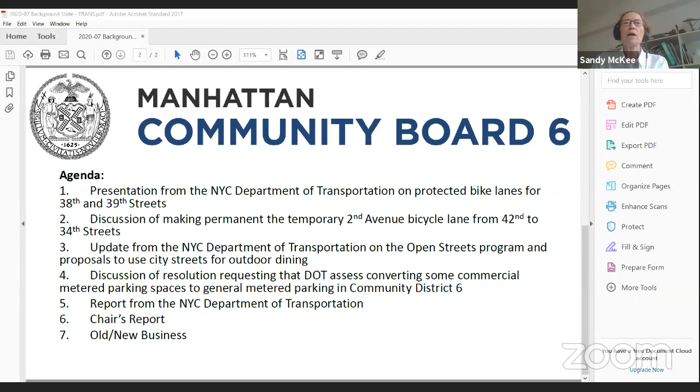And I'm sorry, do we have someone? Not all at once now, not all at once. No one so far. Oh, Phil. Well, Phil took them last month. Let's, I'm happy to share the wealth. Joan, it's an inaugural minute taking, would you be interested? No.

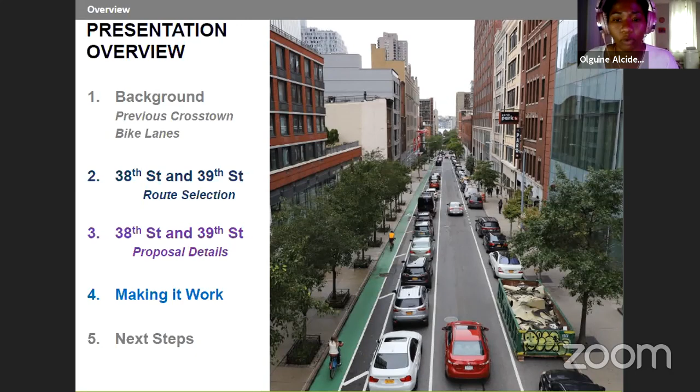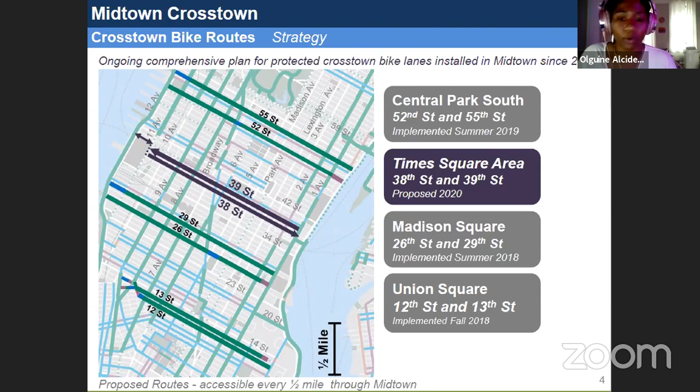This is something that Kim just briefly touched on, but the map shown here shows the previous crosstown routes to demonstrate the ongoing comprehensive plan for protected crosstown bike lanes in Midtown. This effort began in 2018 and includes routes spaced every half mile apart through Midtown from Union Square to Central Park.

Starting in 2018, we installed lanes on 26th and 29th, 12th and 13th, and most recently on 52nd and 55th Street, which are shown here on green. Tonight, we'll be discussing our proposal for 38th and 39th Street.

These projects all build on the ongoing conversations and feedback we've received from the Community Board and CB 5 and 4. Additionally, they work towards a goal of installing new crosstown protected bike lanes to close the gaps in the network, upgrade existing bike lanes to provide better access to destinations, transit, and greenways, while still accommodating traffic and loading in their design. Lastly, we plan to have a similar process to previous crosstowns and looking to the board to work with us on perfecting the design to meet many of the different land uses and stakeholder concerns that may come up.

In terms of outcomes following the installation of lanes in the 50s and 20s, we found that installation resulted in an increase of cyclists using the lanes along these corridors. Vehicle travel times were also not adversely affected by the redesign of the corridors, and the updates to the curbside regulations were effective and well used. The design elements in these projects were generally found to be both replicable and flexible for use in Midtown.

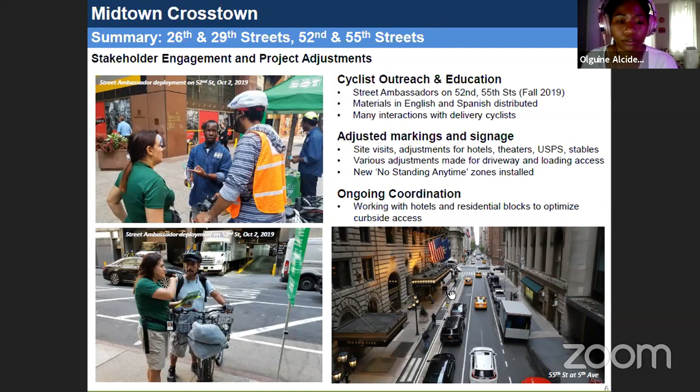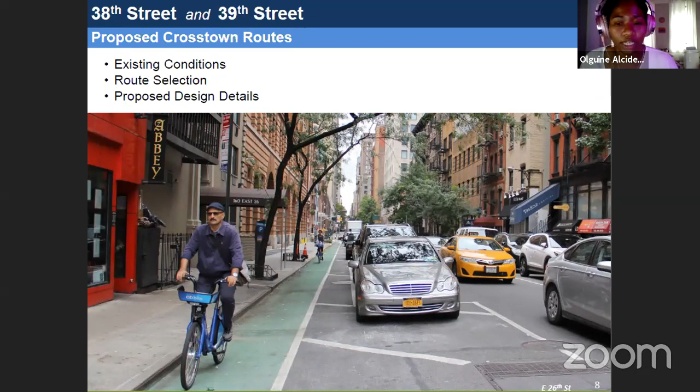Moving on to route selection, I'll review the existing conditions of the proposed project area, the selection process, and the details of our design. The area surrounding our proposal includes Midtown between 34th Street and 42nd Street. For context, the area includes high volume destinations such as Times Square, Bryant Park, Javits Center, and a dense commercial district.

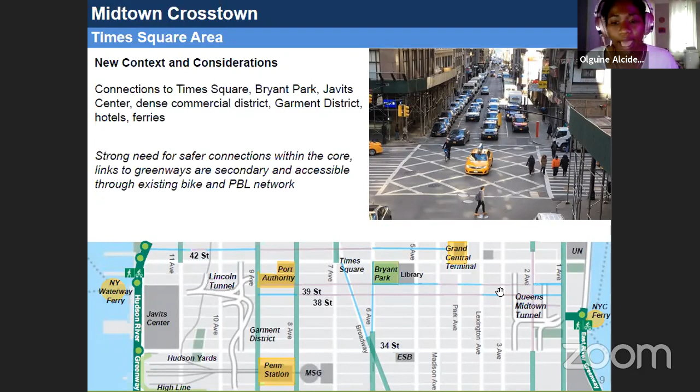In relation to the bicycle network, there's generally a lack of protected bicycle lanes, which makes it difficult to access many of the various destinations identified on this map. As you can see, the green lines are the protected routes, and the blue and pink identify the conventional and shared lane. These exist in some areas, but generally there's a lack of continuous and connected infrastructure in Midtown.

The streets in this area differ a bit from the previous crosstown routes in the 50s and the 20s. Some new considerations include wider roadways with multiple travel lanes, and in our observations, we found that there is excess capacity during the off-peak. The 10-foot travel lanes include shared bike lanes in some areas, which make them narrow for simultaneous travel.

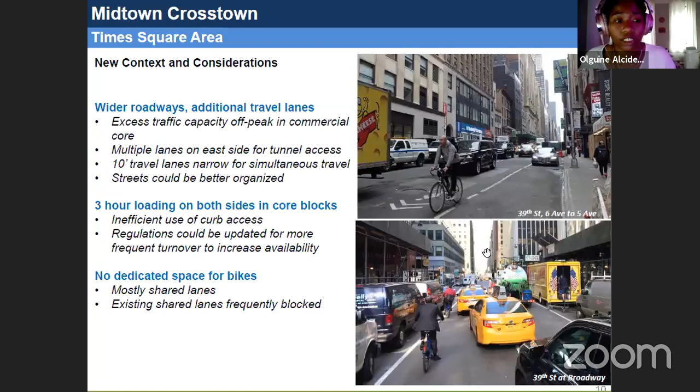In terms of our route selection process, we considered the area between 42nd and 34th Street to be optimal for maintaining the half-mile distance from the previously installed crosstown routes. Similarly to the previous crosstown routes, we looked at continuity and connectivity as the greatest determining factors for our route selection. But for this area of Midtown and for this project, there were some additional challenges in the street network that were taken into consideration in our planning process.

Also, in terms of connectivity, there weren't many streets in this area that connect from the Hudson to the East River. So we prioritized streets that connect across town to the First Avenue bike lane.

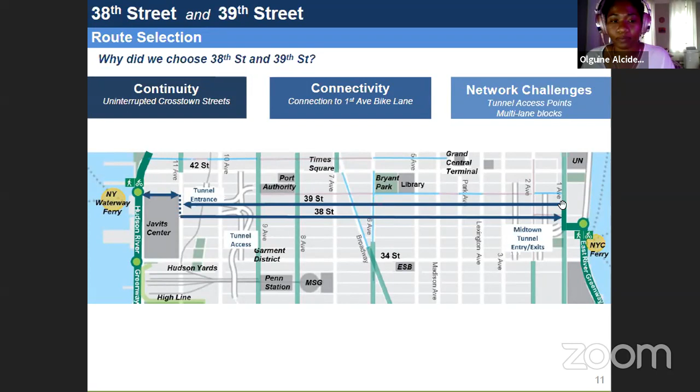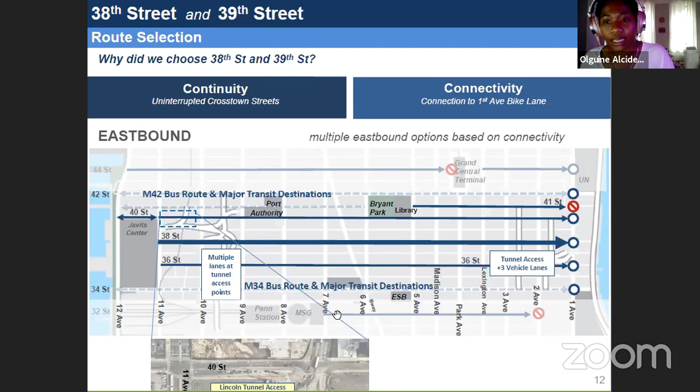Looking at the eastbound streets in this area, 38th Street really stands out as one of the most viable eastbound routes between 11th Avenue and First Avenue. Just to call out one of the many issues with the neighboring streets, 40th Street crosses the Lincoln Tunnel entrance and a major Port Authority exit, and we see similar difficult network conditions on the other neighboring routes.

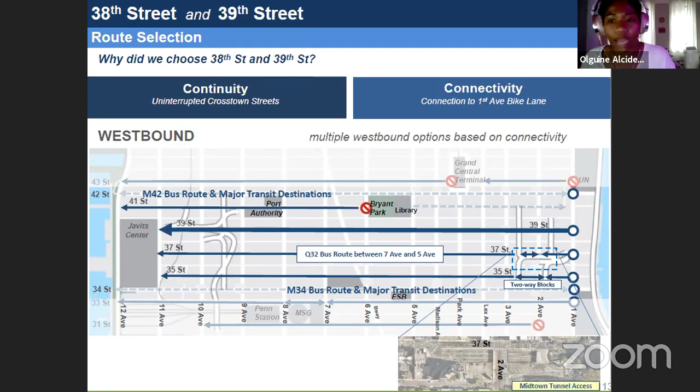In the westbound direction, 39th Street similarly stands out as the best option, as many of the neighboring routes overlap with tunnel entrances, or are discontinuous, or have two-way conditions that are not ideal for our proposed design.

Moving into some details of our presentation and proposal, the previous crosstown protected bike lanes featured two designs: delineator-protected with curbside buffered bike lanes, and parking-protected lanes, similar to what we've seen on the previous crosstowns like 26th and 29th, 52nd and 55th. Our proposal for 38th and 39th Street will use very similar treatments, but incorporate rush hour lanes to accommodate the higher vehicle volumes seen during peak traffic conditions.

38th and 39th Street can be broken down into three distinct neighborhoods with different characteristics. On the west side within CB4, we have the Lincoln Tunnel access and mostly one travel lane with two parking lanes. In the commercial core within CB5, the streets generally have two travel and two parking lanes. Lastly, on the east side in CB6, which we'll be discussing tonight, the blocks are very irregular and have multiple travel lanes and rush hour lanes. These irregular blocks are what we'll be focusing on for tonight's presentation.

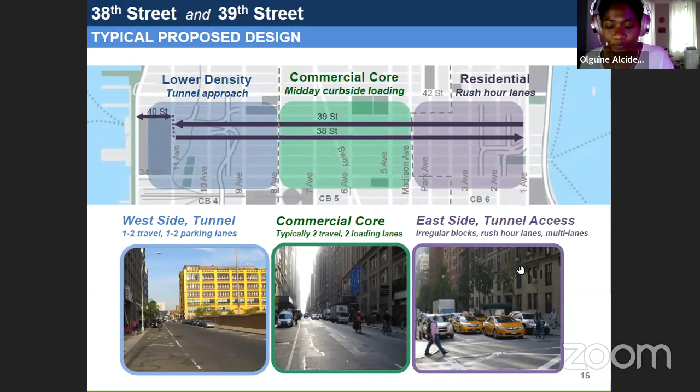On a related note, in response to COVID and the need to develop transportation options as the city reopens, we've been installing temporary bicycle routes throughout the city. Last month, we began installation of barrels and signage to provide space for cyclists on 38th and 39th, west of Madison Avenue. 38th and 39th Street had two travel lanes and two parking lanes.

As part of the temporary design, we shifted the parking lane into the second moving lane, shown here in this cross section. This provides space for the temporary lane and barrels. We've been monitoring these lanes daily, with some of our staff going out to shift these back into place, hang additional signage, and speak to business owners and drivers along the corridor.

We're reaching the halfway point of the presentation and moving into some of the details of our design. The core proposed design for 38th and 39th Street, between 8th Avenue and Madison, is very similar to the previous crosstowns I've mentioned, in that it provides a parking protected bike lane along both streets.

However, it will differ from the temporary design. The thing to focus on here is that this is really identifying the CB5 section. This design is flexible in that it provides dedicated space for cyclists, but still allows for the two lanes of traffic for the high vehicle volume during the day.

And it maintains overnight and off-peak loading and parking. So the curbside lane is also a far more comfortable condition for cyclists who use the existing shared routes at this location. The described treatment will also be seen in some of the areas we'll be discussing east of Madison Avenue.

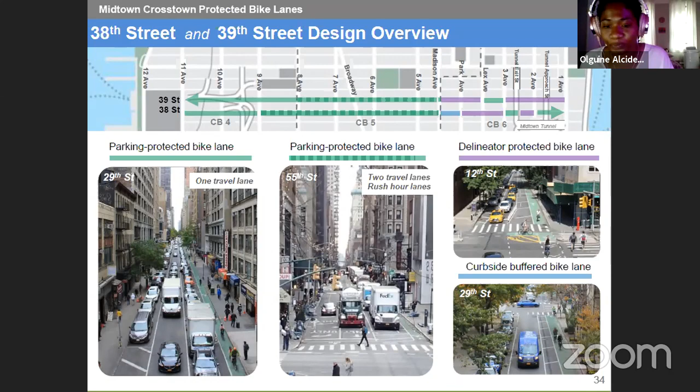To touch on next steps, tonight we discussed the segments of 38th and 39th Street, which fall within the boundaries of CB6. However, we also wanted to briefly touch on the typical design for the western segments of the proposals. On the CB4 side, the design would be parking protected with a single travel lane. In CB5, where the densest commercial activity occurs and the street width is a bit more generous, the design is more typical, with parking protected bike lanes and rush hour lanes, which maintain two travel lanes during peak conditions. The design varies the most in CB6, which we've covered tonight, with delineator protected bike lanes, curbside bike lanes, and even some rush hour treatments in select locations.

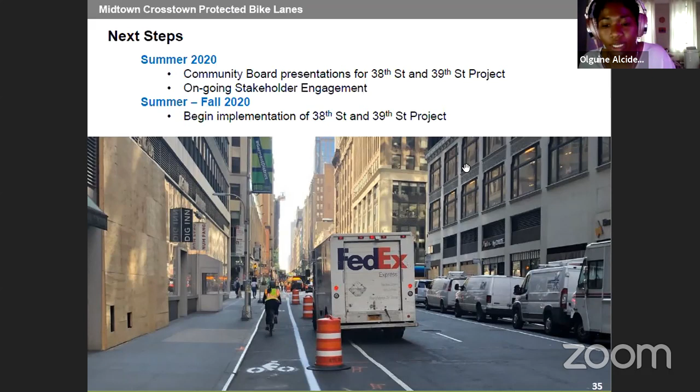Again, for next steps, we would like to move as soon as late summer or early fall with installing these lanes permanently in response to the demand we've seen from the temporary lanes. But we would continue to engage with stakeholders and the neighboring community boards.

Thank you, and I guess I'll open up to any questions. Thank you very much, and just a reminder, we do take questions from committee members first, and then if we have time, we take them from the public. I did have a couple questions myself, if you don't mind.

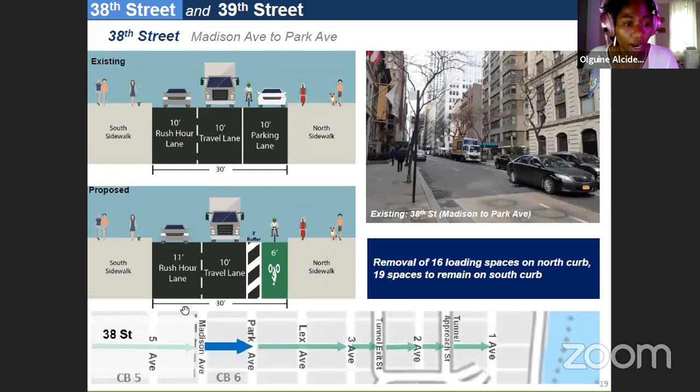I wondered why on 38th Street you're shifting to the north side of the street, where currently the bike infrastructure is on the south side. Are you referring to the sharrows? Yes, sharrows are on the south side of the street. Generally, we've designed the protected bike lane to go with the flow of traffic and also take advantage of the parking lane on the existing side of traffic. Currently, we wanted to maintain the rush hour lane on the opposite curb.

So people going down First Avenue to get to the Greenway will have to cross the traffic. Currently there's a two-way section of First Avenue on that last block of 38th Street, so cyclists would be able to turn at this location to make that connection to the Greenway. Right now they have to cross the street to do it, I'm just wondering—yeah, that would be on the north side throughout the full district. It would be on the north side, but something we're looking at on First Avenue is a turn treatment to make that connection a little bit safer.

Okay, thank you. And I guess we should ask how many parking spaces will be reduced. It differs by block, but we've also included a breakdown of the parking loss numbers at each location. It seems fantastic, it's not a problem I don't think in this district, in this area. So I'll open it up to questions.

Larry, you had a question? Your hand is raised. Okay, I'm unmuted. I had some questions to try to get a better understanding of what's going to happen.

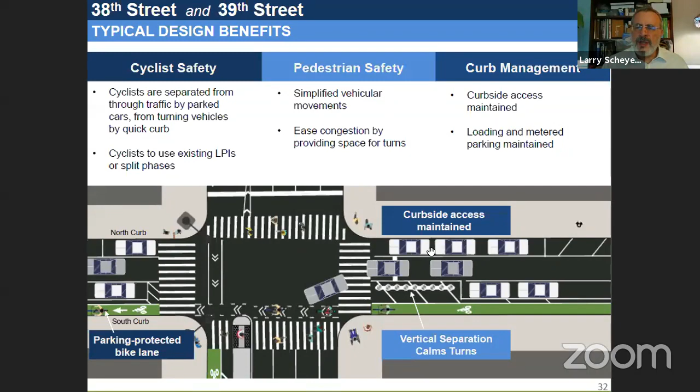As Sandy's question noted, at 38th Street and First Avenue, as I understand it, that means you're going to have to wait through a phase of the light in order to go down to 37th Street via First Avenue? Yes. Okay.

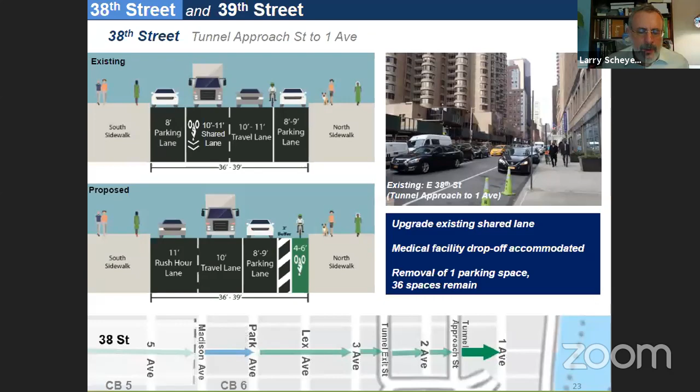At 39th Street and 2nd Avenue on the southeast corner, there's currently a Citi Bike station, which you depicted in one of the photographs. Where will that be moving? So generally, we would look to relocate some of those Citi Bike stations onto the avenues, but this is something we're still discussing with Bike Share, and we don't yet have a location, but that's something we're coordinating on.

Okay, because that's a very important bike share station—I use it to go to the NYU Rusk Institute building at 38th and 2nd. So there are many users there, both doctors and patients, for whom keeping that station nearby would be helpful.

Yes, we'll take that into mind.

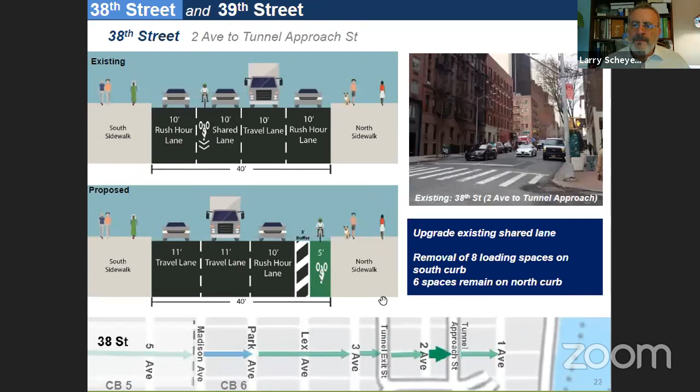Okay, and then one other thing that you showed was hotel zones. I was not clear, maybe you could go over that again, where the bikes are going along in a protected lane. Would there be a situation where there would be a conflict between cyclists and people moving luggage who may not be paying attention?

So what we would employ at this location, and what we've installed at previous hotel loading zones, is really a treatment specifically to warn cyclists as they're moving through the area. In past hotel loading zones we've installed, we've found that some stakeholders have even put out additional signage to slow cyclists through that area, but there would be appropriate signage and clear markings on the street to indicate to cyclists that they're moving through an area where there's hotel activity going on.

Yeah, hopefully it won't be forcing you to zigzag, because some vehicles pull in straight to the curb and don't leave any room for the bicyclists. This condition exists currently on the 55th Street and 52nd bike lanes, and it seems to be working fairly well through our district anyway.

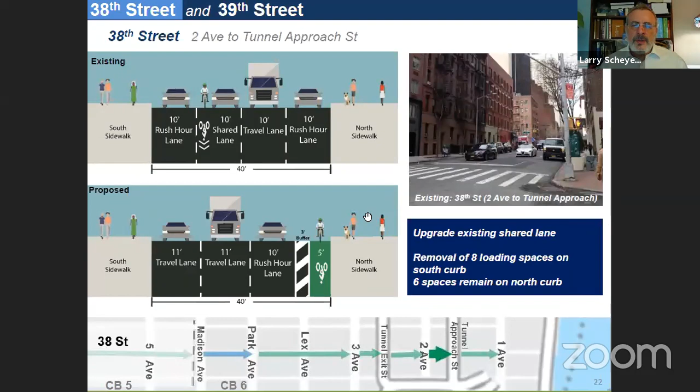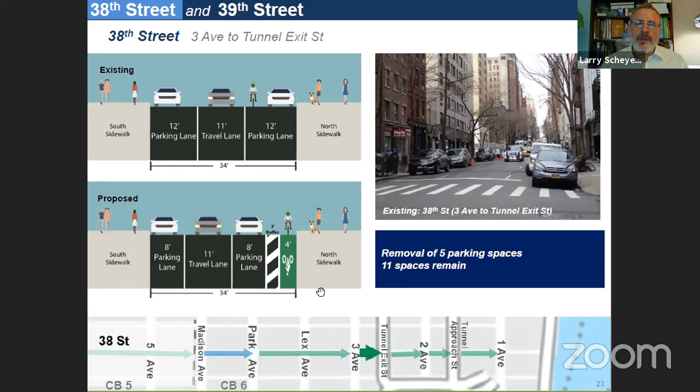Okay, good, good. And then the last question concerns, not now in the middle of the summer, but when we get to the winter - I noticed the width of various segments of the bike lane plus the buffer zone are rather narrow. I'm wondering, if you don't have specialized snow plowing equipment, how you intend to keep that bike lane clear.

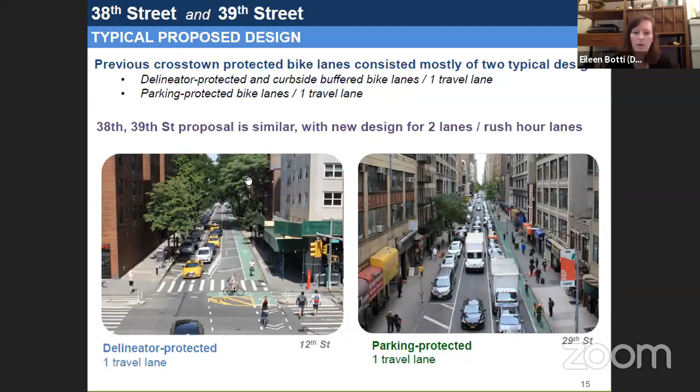Hi, I can jump in. This is Eileen with the bike unit also. We have similar clearance on the other crosstown lanes. What we usually do here is that they get swept and plowed during alternate side, or in this location where the meter turns over, so these vehicles are moving each day. There'll be a lot of opportunities to get in there and sweep without even needing the specialized plowing equipment here. If it is needed, we can look into that as well, but usually it's worked out pretty well with the vehicles moving, since it's parking protected.

Well, how does that work when you have a lot of snow and vehicles are not forced to be moved?

In some of those scenarios, we have been able to use a much smaller sweeper that's available on a very limited basis. But what we've found, especially on these two streets, is that the vehicles are moving frequently because they're generally commercial meters or rush hour regulations where there's a lot of daily turnover. But we'll keep an eye on it. As to the other lanes that have the delineators, those are designed with that clearance in mind, so plows could always get through.

Okay, thank you very much. That's it for me. Thank you, Larry. Anne, you had your hand raised? Sorry, you're on mute. Sorry, I lost myself and couldn't find myself to unmute.

First of all, I really want to thank you, this is a great presentation. It's very thorough. I really appreciate you answered a lot of my questions as it went along.

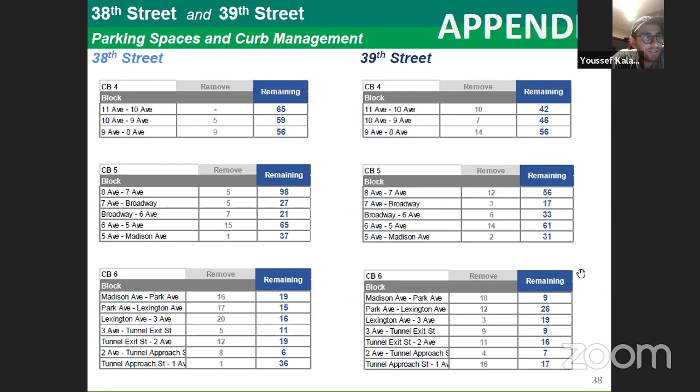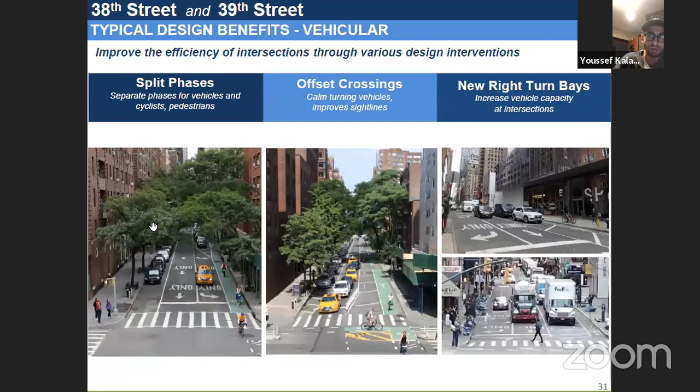Thank you, Sandy. So two quick things. One is I often use the 52nd Street bike lane west to east, and oftentimes that corridor between 3rd Avenue and 2nd Avenue, because there's so much traditional commercial loading, ends up being blocked up typically like in the morning into the afternoon, even though there's a bike lane there. So I'd love to understand what type of outreach is done with some of the larger tenants on those blocks with a lot of commercial loading, and what type of enhanced enforcement is done early on when a new lane is constructed. Because I imagine the same thing's going to happen here, and it ends up, in fact, feeling more dangerous at times than anticipated. Can you just say which blocks that was again? So the 52nd Street west to east bike lane, probably from 3rd Avenue to 2nd Avenue is one of the worst stretches, and again it's all commercial loading. It's fairly large tenants, high rises, those sorts of things.

So I don't know if there's a playbook that DOT utilizes in the early days or months of a new lane being developed in a super commercial heavy area, to drive compliance early on from some of the building owners and so on. Or whether it's just up to folks to report it as often as possible and wait to see what happens. I think it's a little bit of both.

We do stakeholder engagement before we implement, and are sometimes able to hear from them about their particular needs and make design adjustments even before we implement. That depends on where we know there might be issues, or where people give us a heads up that there may be issues. And then after the fact, we also can look at places where there are issues. If you're reporting, if you're seeing things, let us know, and we can see if there's a way to either tweak the regulations or communicate with the property owners.

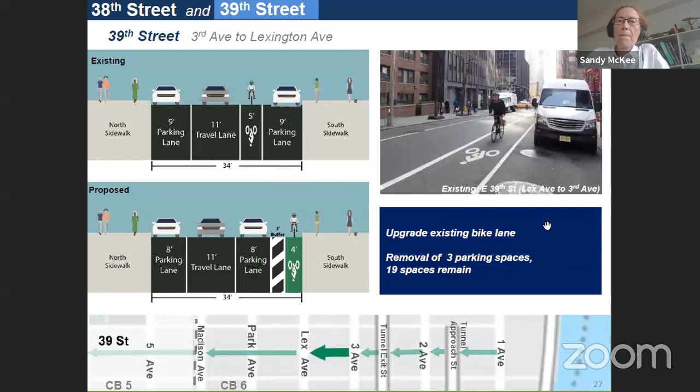It is a problem. We did get one question from the public: why not add flexible delineators to the bike lane between Madison and Park? Or is that 38th? I'm not sure if that's 38th or 39th.

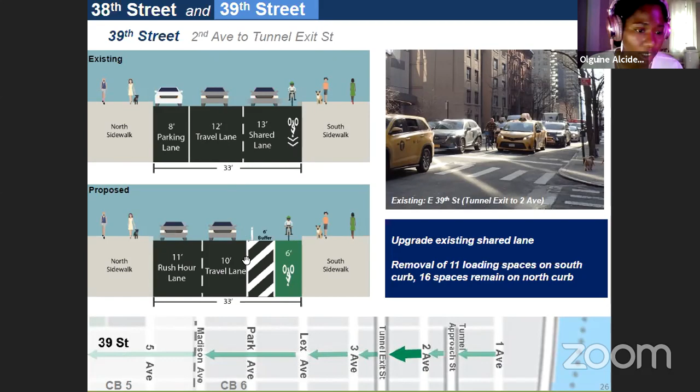Just to point out, I might have gone through it a little too quickly, but on some of the segments where we have that 11-foot clearance, where we can have street sweeping come through without an issue, we've included a flexible delineator, but the block widths do change quite a lot. On some of the narrow sections, it's just not something we could provide and still maintain clean curb.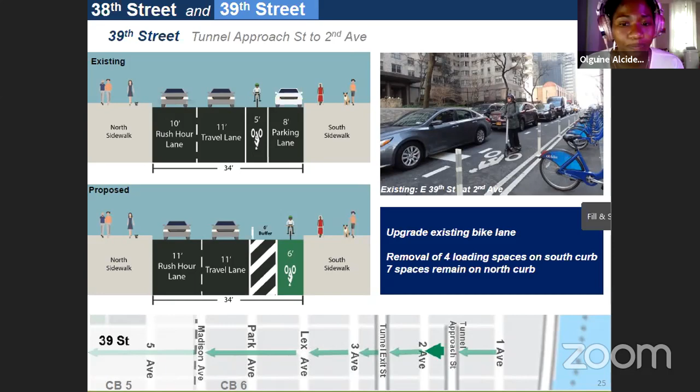Another question: any chance of stronger delineators to prevent parking on the wider buffer zones? On 12th and 13th, those buffer zones are abused, especially at the corners where you really need the better sight lines.

Mike can add to this, but we're looking at new materials right now. There are budgetary constraints, and it is something we're very hot on. However, with this project right now, we're just trying to get it in, and we'll be filling in the gaps. I really appreciate the comments about 52nd and 55th, and we are going to monitor them and add stuff as needed. We are still planning to add some additional delineators to 12th and 13th, recognizing that in some places they are fairly spread out and could be more effective if they're a little bit denser.

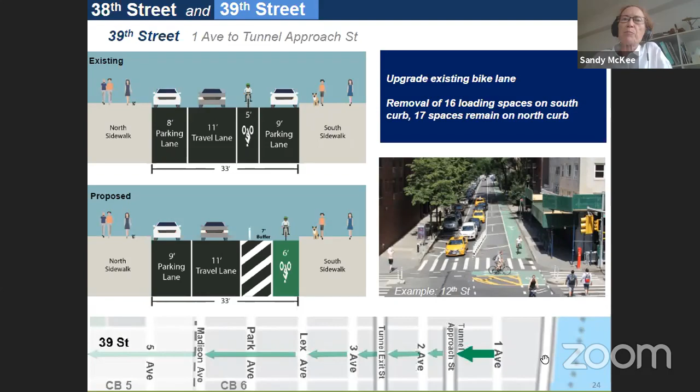So I believe that's still part of our plan. And another question, please repeat the comment about a protected bike lane every half mile for crosstown. Is that meant to be as far down as the Battery?

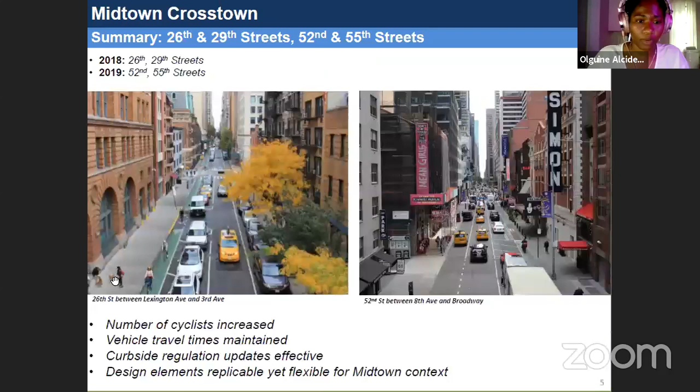So just to go back to the beginning, this was in reference to the previous crosstowns in terms of spacing, just within the limits between 55th Street and 12th Street. Those street pairs are just spaced a half mile apart. But are you planning on extending further south eventually? Currently there's no plans to extend any further south. This, I believe, would be the last pair that we would discuss.

Another question: these lanes would be more effective if the painted buffer zone were replaced with a raised pavement treatment. Does DOT have any plans for something like this on crosstown lanes?

I think Ted's answer to the last question is that raised pavement is very expensive. It's something we're looking at, but at the same time we are meeting concerns right now.

But we are looking at it, and they are capital projects, which is kind of what you're talking about, where you actually have to change the drainage on the street. It gets extremely cost prohibitive. I've always looked at it as the first step, we want to get these lanes in, and as the city redoes streets, which they do every so often, hopefully we can add some of these things in full-on concrete.

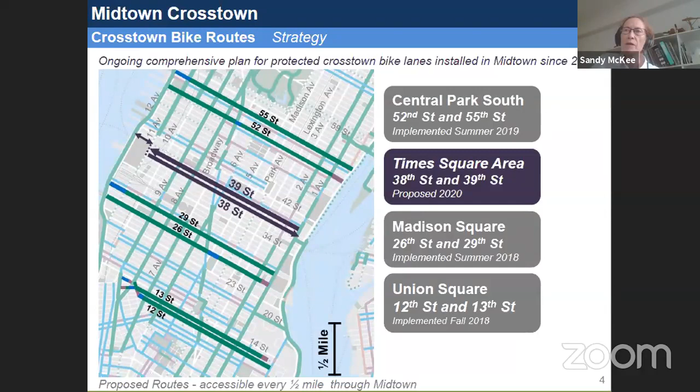Sandy McKee. For. Okay, thank you. Jean Santoro. Yes. All right. Joan Berenbaum. Yes, thank you.

Claire Brennan. I abstain for cause, but I just want to commend everyone who worked on this project for their efforts. And as a committee member, get rid of all the parking.

Sorry, thank you. Beatrice Disman. Yes. Okay. Andrew Gross. For. Okay. Molly Hollister. In favor. Okay. Yusuf Khalid.

Support. Okay, thank you. Phil Napolitano. In favor. Thank you. Matt Roberts. In favor. Thank you. Larry Shire. Thank you. Ann Seligman. I'm in favor, and unless anybody else is dying to, I'll offer to write the reso.

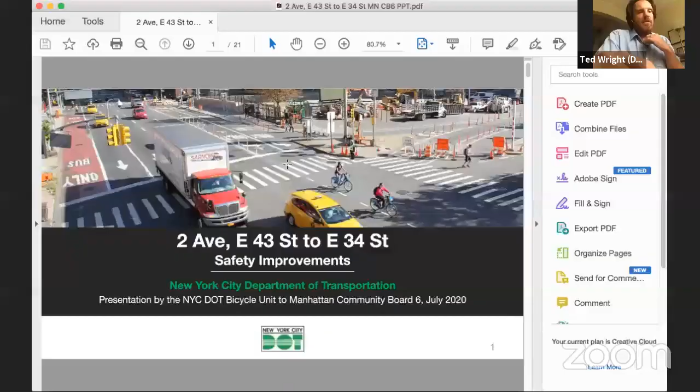Just want to say really quickly before we get into this, you guys, that we've had a lot of people work on this one over the years. Patrick Kennedy, who I believe is here to answer some questions, has done a lot of the legwork on this one, and he deserves a big shout out. He might have to answer some of the questions, but you're in very capable hands with Nick and Paula as well.

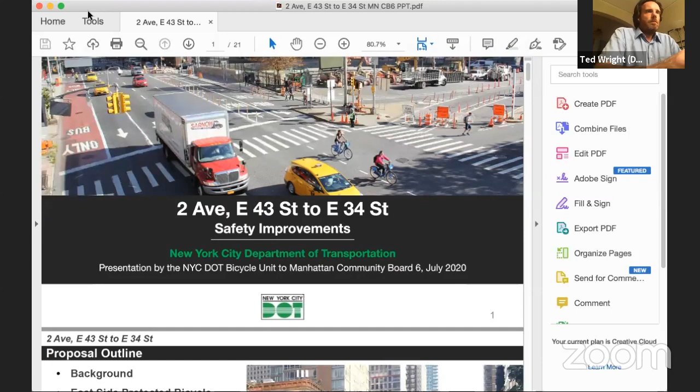Thanks, Ted. What's the key? Is it Control L makes it go full screen, or Apple L?

I might just add that this is a really pleasant surprise. We didn't know about this until, I guess, about a week ago, and it's fantastic that you're coming to us. So thank you.

Great, well thanks for having us. Again, my name is Nick Carey from the DOT Bike Unit, here to talk about the last gap on 2nd Avenue bike lane between 43rd and 34th Streets.

So here's a little bit of the outline of the presentation. We're going to do a little bit of background, and then I'm going to talk a little bit about the temporary lanes we installed with barrels, and then we'll get into our proposal. Could we go to slide 4, please?

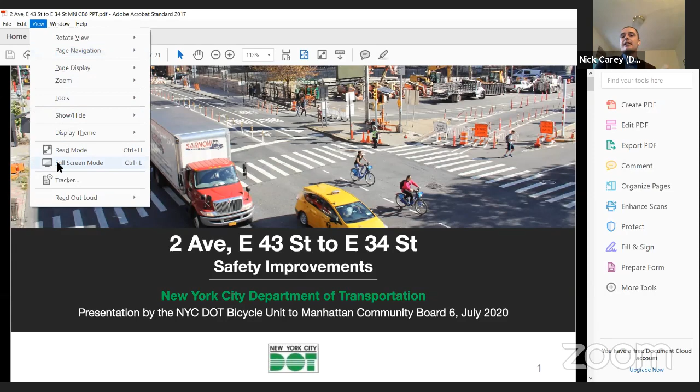I'll just talk about it a little bit since some of this you don't really need the slide for. The crash history shows that 2nd Avenue is a Vision Zero priority corridor, and that 2nd Avenue and 42nd Street and 2nd Avenue and 34th Street are both Vision Zero priority intersections. That means when we look at pedestrian crashes, specifically ones resulting in serious injury or fatality, this corridor and these intersections stick out as hotspots. One of our best tools for improving pedestrian safety on wide streets like 2nd Avenue is protected bike lanes.

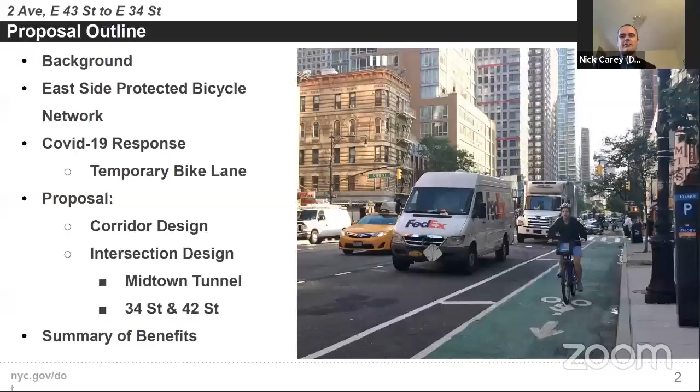CB6 is a pretty savvy board, so I don't need to tell you that a lot of people are biking on 2nd Avenue. But what's interesting is that biking has really been booming during the pandemic, and more people are biking than ever before. We did a rough back-of-the-envelope calculation looking at Citi Bike counts and our own automated counts throughout the city, and weekday cycling is up about 20% and weekend is up about 60%. So there's a lot of people biking.

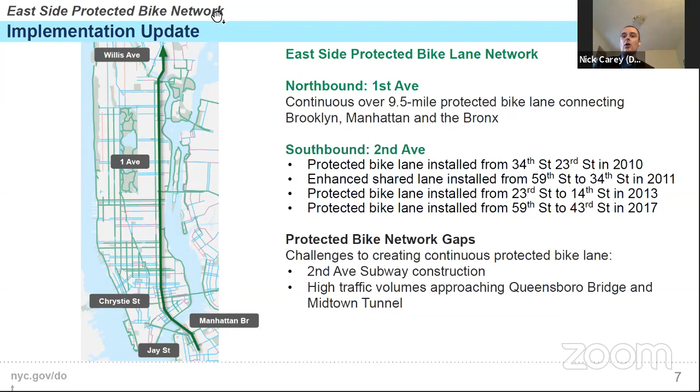And one more - let's talk about the bike network on the east side. I'm not sure how many of you realize this, but this project is a very exciting milestone for the bike network on the east side. There is a nearly continuous protected bike lane from the Manhattan Bridge to the Willis Avenue Bridge via 1st and 2nd Avenues and Allen and Chrystie Streets. This is the last gap, this section of 2nd Avenue between 43rd and 34th Street, the last major gap. If we implement this project, we'll close that gap and people can ride a bike in a continuous protected bike lane from Willis Avenue in the Bronx all the way to Jay Street in downtown Brooklyn.

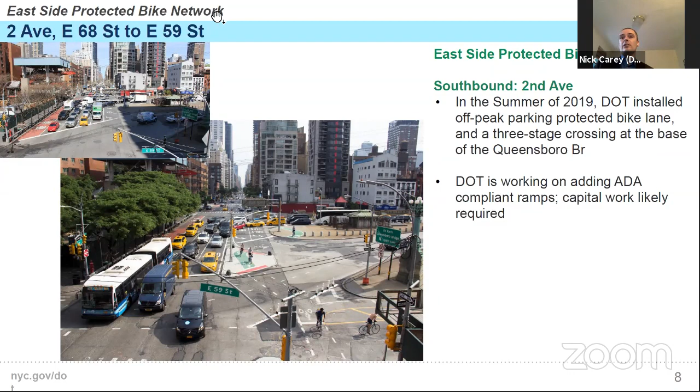So the COVID-19 response, temporary bike lane. During the pandemic, many cities across the country and across the world have been experimenting with installing bike lanes using temporary materials like barrels. Olgun was talking about this in the last presentation, and we have been doing this also in New York with varying levels of success.

We installed barrels on 2nd Avenue, I believe in March. And like Olgun said, it's been a very labor-intensive process for us. Anybody can move those barrels, so we constantly have to monitor and go back and fix them, especially challenging near the Queens Midtown Tunnel. But we're here tonight presenting this proposal in the hope that we can install real bike lanes in their place as soon as possible, with roadway markings, signage, bollards, and signal infrastructure.

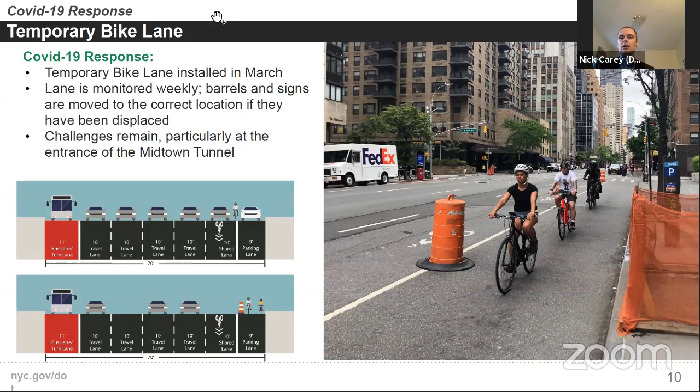So let's talk about the proposal. Actually, first let's talk about the existing conditions. Right now on 2nd Avenue, between 43rd and 34th Streets, there's no dedicated space for people riding bikes. There are shared lane markings on the street, and people biking are expected to share the lane with dense vehicular traffic. There are particularly large vehicular conflicts with people walking and biking at the left turns onto 42nd Street, 34th Street, and especially the Queens Midtown Tunnel entrance at 36th Street.

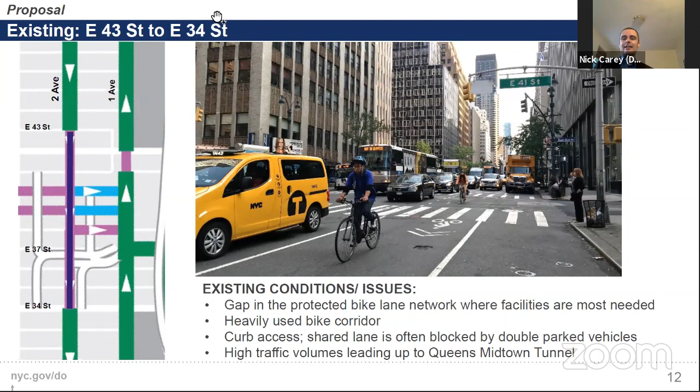So here's our proposal. This is nothing new for you guys. It's the same as what we installed last year between 68th and 59th Streets, and also the same as what we installed in 2017 between 59th and 43rd Streets. The basic idea is we install a green bike lane along the east curb, and the adjacent lane functions as a travel lane during the peak period and a loading lane off-peak.

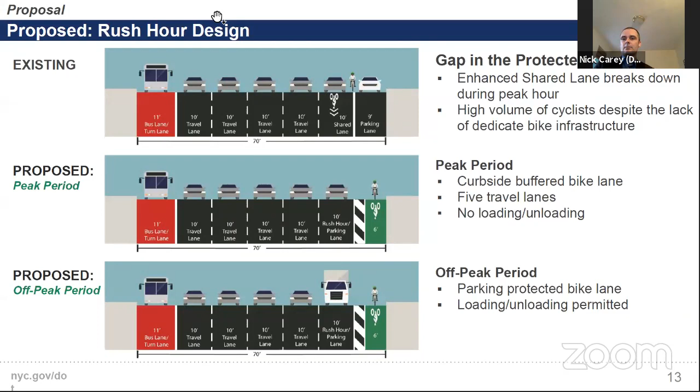During periods with peak vehicular volume, we maintain all existing travel lanes, ban loading from the east curb, and people riding bikes get to ride in a curbside dedicated bike lane. Off-peak, when vehicle volumes are lower, we allow loading in the floating parking lane, and people can ride bikes in a parking protected lane. In the next slide, you'll see photos of similar conditions. On the left, the peak period design is just a curbside bike lane with no parked cars. On the right, you see what happens when loading is allowed and it becomes a parking protected lane.

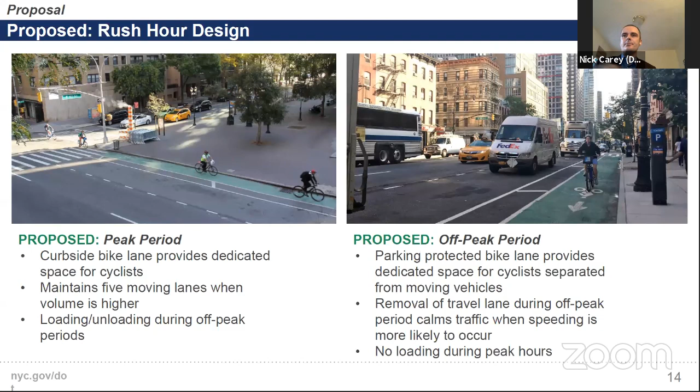It's tough for pedestrians too, because it's a very long crosswalk on the east side, and there's a very high volume double left turn going into the tunnel. Pedestrians are crossing the tunnel entrance at the same time as vehicles are making the left turn from 2nd Avenue into the tunnel, so it's really not ideal, not a very inviting space. Another unusual component to this intersection is the unsignalized slip lane for vehicles entering the tunnel from 2nd Avenue.

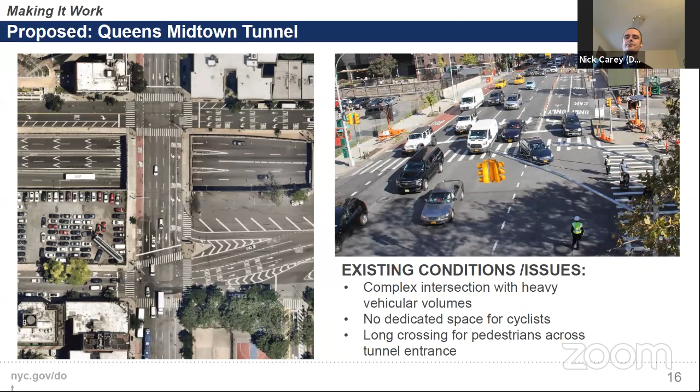Next slide please. So here's our proposal for the entrance to the Queens Midtown Tunnel. One, we install a buffered bike lane along the east curb. Two, close the unsignalized slip lane into the tunnel, which is currently only open sometimes, but we want to close it so that cars aren't darting across the crosswalk and bike lane at high speed. Three, we want to change the signal phasing to a split phase, which means that people riding bikes and people walking on the east crosswalk will have a protected signal phase completely separated from the vehicular turn phase.

I know signal timing is kind of a boring subject, but it's important that you understand the distinction here, because right now that heavy turn from 2nd Avenue happens at the same time as pedestrians crossing in the east crosswalk. Fully separating these movements will be a huge safety improvement and quality of life improvement, frankly.

And let me tell you, as an engineer, and from a bureaucrat's perspective, making operational changes to such a congested intersection is not something we take lightly. Because it's already so congested entering the tunnel, we certainly don't want to make it worse. We don't want the queues to stretch even longer and make life harder for more people. It's a really sticky problem, and I think that's part of why it's the last gap in the 2nd Avenue bike lane network.

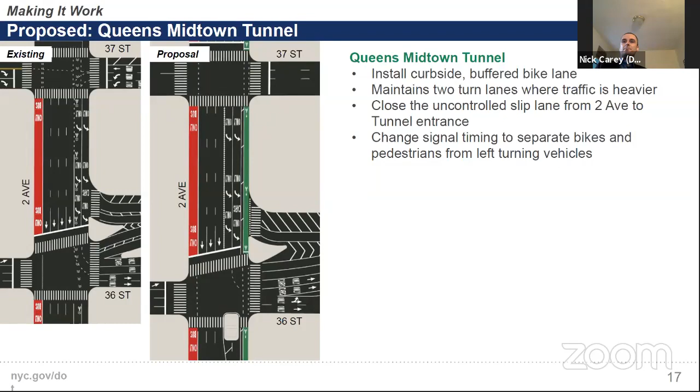A couple other operational changes I'd like to mention. First, we also want to install split phases for the left turns from 2nd Avenue onto 42nd Street and onto 34th Street. Both of these intersections are Vision Zero priority intersections with heavy left turn volume. So similar to 36th Street, we want to install protected turn phases so people biking on 2nd Avenue and people walking in the east crosswalk can cross 42nd Street and 34th Street without vehicular conflicts.

The last thing I want to point out is the block on 2nd Avenue between 43rd and 42nd Streets, where the Israeli consulate is located on the east side, and the police department sets up metal barricades next to the east curb. To accommodate this, we altered our design so there's a 3-foot wide painted buffer between the bike lane and the curb, so the police department can continue to set up the metal barriers without impacting the bike lane.

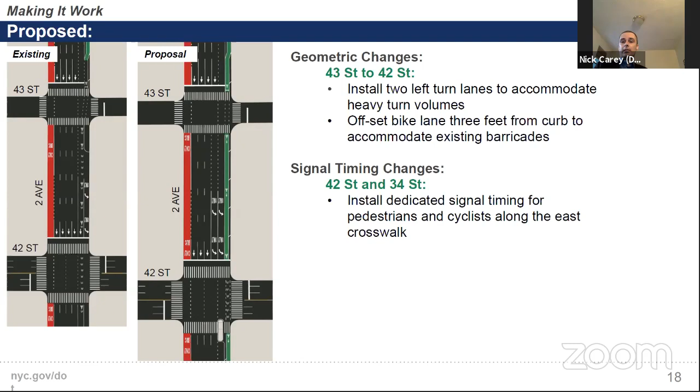All right, on to the summary of benefits. Let's do this, guys—let's improve safety. Let's improve access for people crossing the Queens Midtown Tunnel. Let's improve safety at 42nd and 34th Streets, which are Vision Zero priority intersections, and let's close the gap in the 2nd Avenue protected bike lane. This is it. It's 2020. Let's do it. That's it.

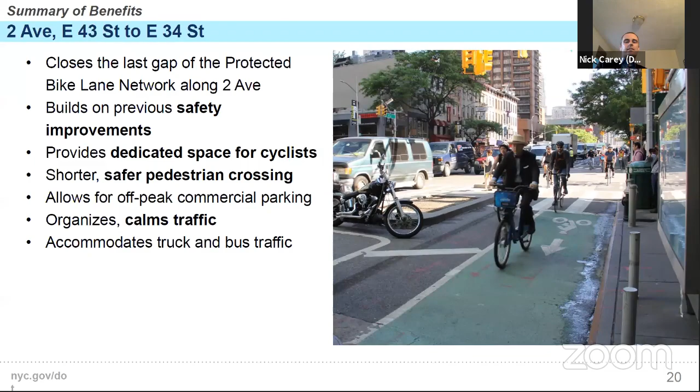Are there any questions?

Sorry, I have a couple questions myself. One, the 42nd to 43rd block—we had a presentation, I guess it was the Ford Foundation, saying they're planning on implementing a new bollard system there, which may alleviate some of these problems. I'm not sure if they're moving forward with it, but it seemed hopeful that they wouldn't be blocking the street anymore, that they'd be setting up something on the sidewalk. So maybe it's worth reaching out or coordinating with them.

That's great, thank you. Yeah. I don't know, we have lots of questions, but okay Ann, you're first.

Okay, so I also was going to say something about coordinating with the Ford Foundation and the changes they're making there. I love the idea of having the bike lane offset, so something can be done, because we know that's a high danger intersection. But I think you all need to talk to each other, and if this is the plan you go with, make sure the PD doesn't just set the blocks perpendicular to the sidewalk and block the bike lane too, which is certainly not impossible. The other thing I'd say is you're talking to transportation geeks—we love hearing about signal timing. I suspect most people here would say that.

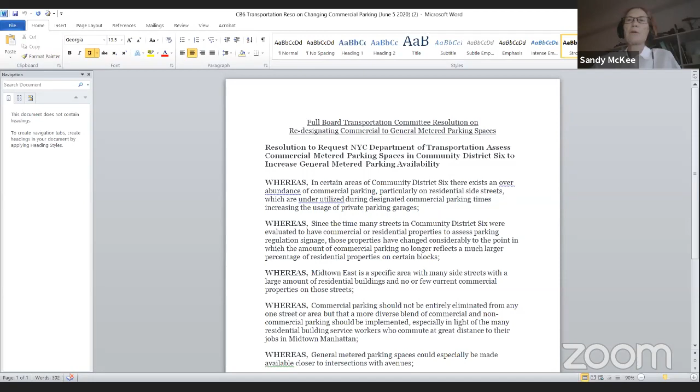The next item on the agenda is a discussion of a resolution requesting the DOT assess converting some commercial metered parking spaces to general metered parking in Community District 6. This was a resolution that Andrew very kindly, very quickly put together to address some of the commercial spaces in his area. And it's here before you. I know the last time we brought this up, there was concern that we really needed to discuss it as a group instead of having a very fast pass-through. And I think, Ann, you had some comments you wanted to make.

I do. I can start at either the general or the specific. But I'll start at the general. And I think my biggest issue is I'm not exactly sure who we think would use these spaces.

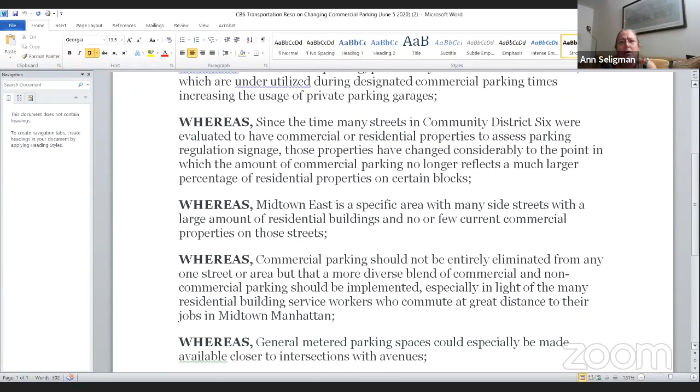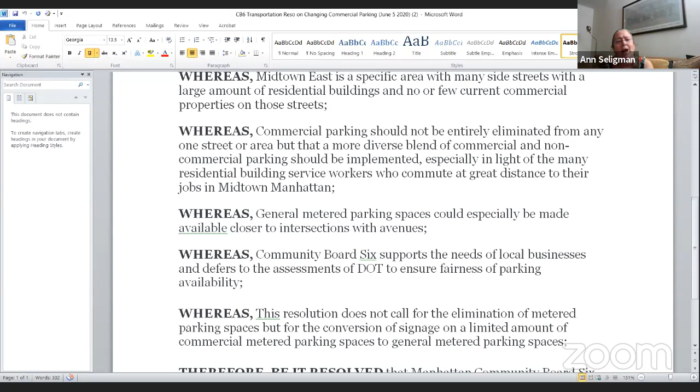If we converted some local commercial spaces—and honestly, I'm all in favor of having DOT investigate this, despite what they just said about how run ragged they are. But I'm not sure who would use these spaces. As far as I can tell, there are essentially no alternate side parking spaces in Midtown. I did a little research on this, using my Best Parking app to look, and there's a few blocks here and there that have some, but basically I think if you own a car between 29th Street and 58th Street, and I am one of those people, you cannot use alternate side parking.

So we're not really a shopping destination, and I'm not sure we want to encourage non-residents coming and parking. If what we're talking about is converting commercial parking spaces—2-hour metered spaces, which is what we have mostly here—to 2-hour non-commercial, I'm not sure who's going to use that. And if it's people coming from other places driving here looking for parking, I'm not sure we want to encourage that. That's one general comment I'd really like to understand. I have a lot of specific issues we can come back to.

The other general point I'll say is everywhere in this resolution where it says commercial parking, we should really think about diplomatic parking, because personal observation, totally anecdotal, those are the spaces that are empty—the diplomatic spaces, not the commercial spaces. So Sandy, I'll leave it there, and you can come back to me on specifics after other people have had a say.

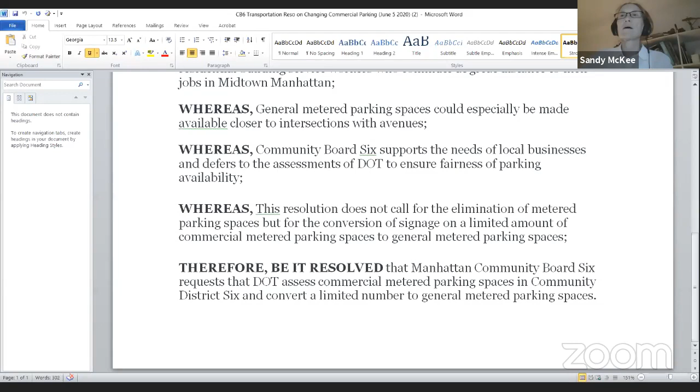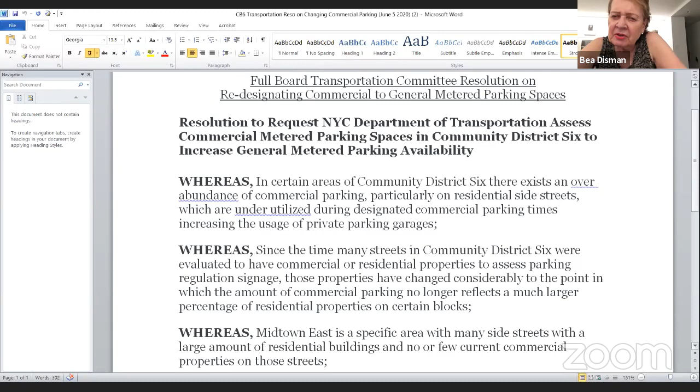I was looking at the resolution and had a couple of comments. I don't know what the end goal is of the study. I don't know if in writing it there was something in mind, Andrew, about whether we were looking to convert 10%, 15%. I share some of Anne's comments as to who exactly would take those places, but this is so generalized that I don't know what our end goal is. I was wondering, I know we're asking to look at it, but did you have any goals in mind when presenting this?

Sandy, can I respond? Yes, please, go right ahead. Actually, yeah, that's a great question.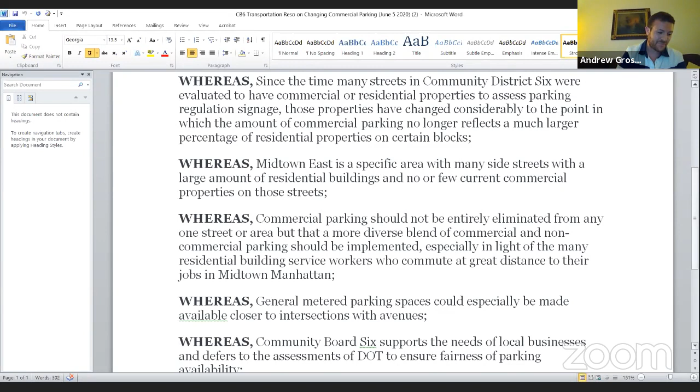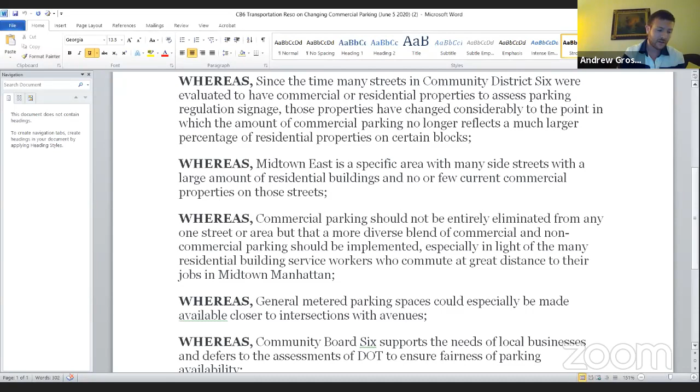To Ann's point, Ann and I actually live in the same building, and Ann asked who would use the spaces—it's actually the people who work in our building who asked me to do this. The doormen, the super, these guys asked me, and that's who originally came up with this idea. My perspective is, we're on the board, we represent the interests of this area, and there's a lot of people working, coming in all the time, from faraway places to do jobs we need done. Not all of them have easy access to public transit from where they're coming to do these jobs. What they basically said is, look, they're out in the street all day, they see there's a lot of commercial spaces, at least on our block and other blocks nearby, that just aren't utilized. When I posed this to DOT, their initial point was, look, these areas were marked for commercial parking likely in an era with a very different zoning situation here, where there was more retail or restaurants. It could have been zoned 20, 30 years ago, or these signs assigned that long ago.

So basically the reason this is so general is just to ask DOT to take a look at the parking situation, see if there are any spaces underutilized for commercial that could just be flipped to regular metered spots, so people don't have to put their car in an expensive garage all the time. If DOT says these spots are totally utilized or needed by commercial businesses, then no need. But if they're really underutilized, then why not let the public take advantage instead of making people put their car in private lots if they're available? That was the thought process behind this.

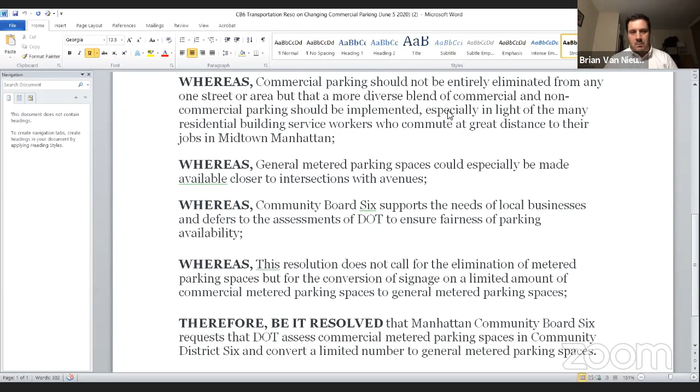I think I was going to call the question. I think we've been over this—this is the second time around. We took it to full board and they sent it back to us with some good reasons. The committee's questions tonight have made it pretty plain there are some serious questions about why this reso even exists. Actually, it did not go to full board.

I'm sorry, I thought it had gone there—my mistake, no it hasn't. Okay, then I take back my comment, my stupid comment. But on the other hand, I will continue with the rest of my stupid comment: it's pretty clear from the questioning that the committee doesn't see the point of this. So I'd like to call the question so we can take a vote and find out what we're going to do with it.

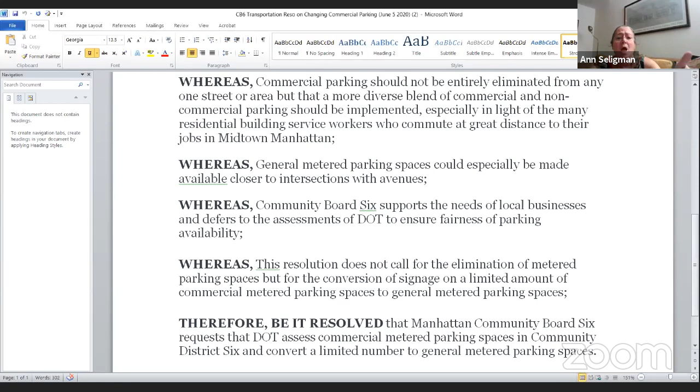I don't have a problem with exploring with DOT, if they have the bandwidth, the question of the balance of commercial parking, and if we can add diplomatic parking. The resolve is that we convert a limited number. I will not vote for that, but I would vote for a resolution. I have some other changes here, logical issues that Andrew, I'd be happy to work with you on. But I would vote for having them assess the balance of commercial, residential, or commercial open parking, and diplomatic parking. Because frankly, I think diplomatic parking is what gets left empty. And if I could remind everyone, we did recently pass a reso asking DOT to take a look at all of our street use, and this actually falls within it. We want to know how to better use the space we have in our streets.

It's not time sensitive. Andrew, if you and Ann want to tweak this some more, maybe we could come back to it in September. Sure, I'd be happy. You know, Andrew, let's meet in the Pops on 46th and 2nd, which is now happily reopened, and we can talk about it. I think Ann raised some ideas to modify it, and what she said is actually in the spirit of what this is trying to do, so I have no problem sitting and looking at that with her. Great, we'll make it more robust and follow on with some of the other discussions we've had.